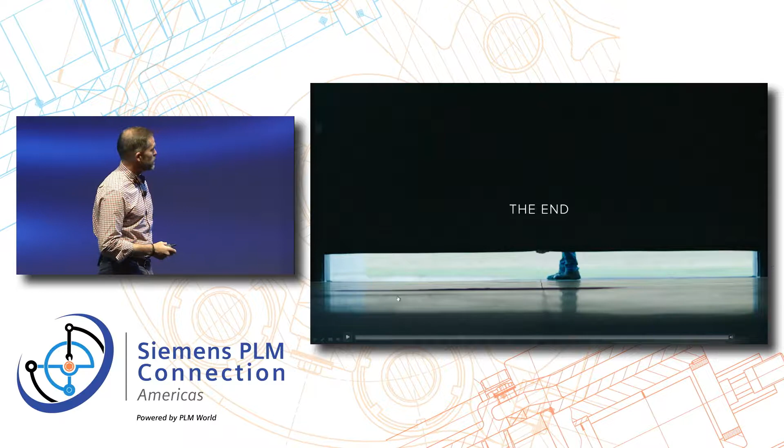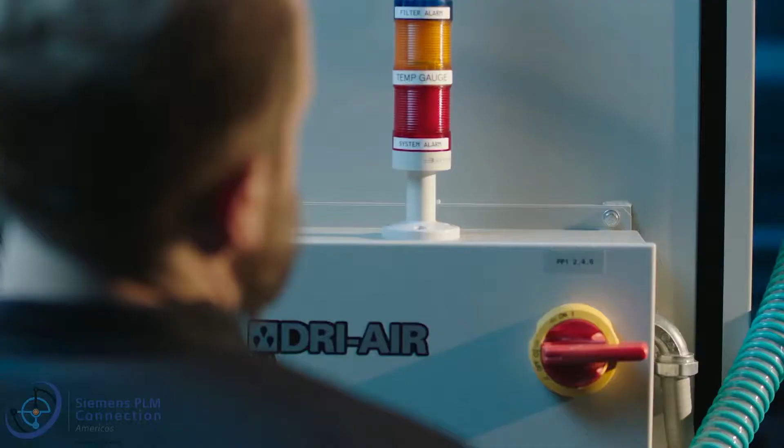This is the end. The end of the assembly line. The end of the showroom floor. The end of the smooth-talking salesman. The hard sell. The soft sell. The oversized inflatable gorillas and overinflated inventory that absolutely must go. This is the end of the junkyard full of old cars leaching chemicals into the ground.

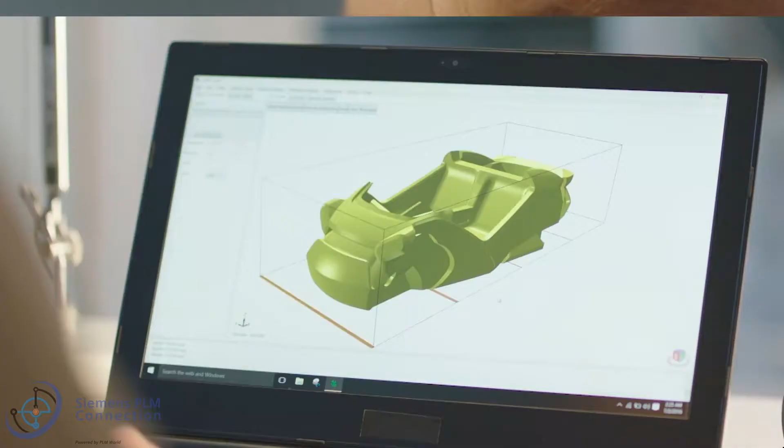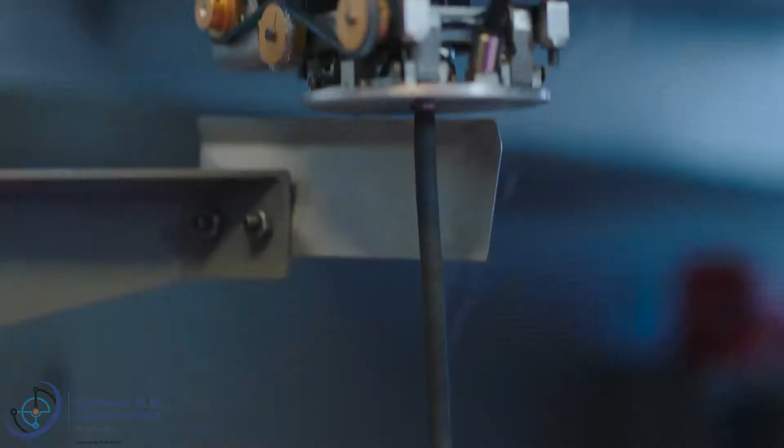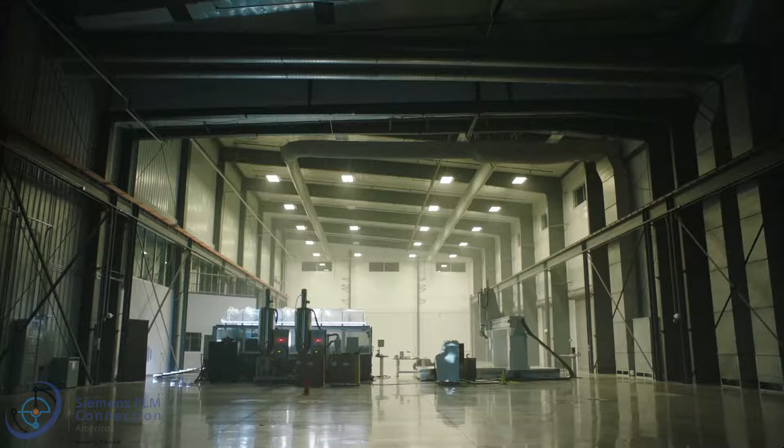Born from the concept of cradle-to-cradle manufacturing, printed in front of you to be the exact car you want. Melted, deconstructed, and rebuilt to be the next car you need. This is where vehicle manufacturing as we know it comes to an end, and where vehicle manufacturing as it should be begins.

Starting at the end gives you a really good idea of what it was like to come along this journey. In 2004 and 2005, I was a Marine patrolling the lower 250 miles of Iraq. During that deployment, two of my friends were killed - one in a Humvee in a frontal ambush, and the other in a CH-46 helicopter that was shot down, flipped over, and he drowned in it.

During that deployment, I was really thinking hard about whether I was going to share the same fate, or whether I was going to come home and do the next thing in my life. I was reading a book at the time written by a brilliant guy named Amory Lovins, who talked about using epoxy composites to make lightweight sheet material.

That was known as FiberForge at the time. The business doesn't exist in the same form now, but it was inspiring for me to think about building things in a different way. I knew that if my friends had had different equipment in Iraq, we would have had a different outcome for their lives, certainly. That inspired me to start this business.

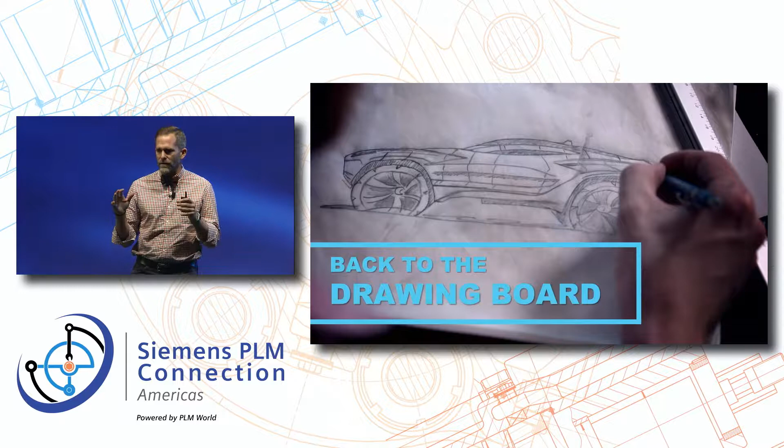But I started by going back to the drawing board. Many of the fundamentals of manufacturing, starting with that video at the end, were things I was just imagining at the time. I wanted to make products, make big products, make vehicles digitally so we could accept new technology into them. At the time, I was thinking about things like armor and drivetrain and Blue Force trackers and other things like that.

The point being is that it was so difficult to stamp steel and make tooling that it was hard to imagine how you could reduce the cost and time to develop a vehicle in order to onboard that new technology.

So we went back to the drawing board, and I was sitting there with a piece of paper in my Quonset hut south of Baghdad, thinking about how I was going to build this business. It started with these two elements.

The first one, at the end, the microfactory, I imagined as something like carving a clay model, not by hand, but doing it by a CNC device. I had used plasma cutters before. Water jets weren't around for me to use, but I was imagining something that could move fast and work on a structural material.

That was the concept of putting it together in a microfactory where you could have one machine that worked on digital instructions, or you could have 20, and it didn't cost you any more if you wanted to add them — just the CapEx of doing it, but there wasn't any economy of scale you would get.

Then on the other side came about a year later. As I really began to dig in and write the business plan, I thought, what if I am right? What if we could discover a digital microfactory that really could work from concept to production very quickly? I wasn't sure where all the ideas would come from.

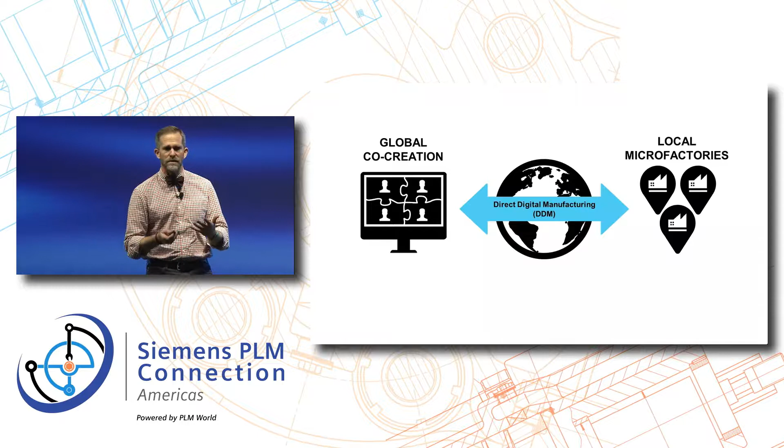By ideas, what I mean is not just the designs, but where would the technologies come from that would be the new pieces of armor or pieces of gear that you would hang on. One of my advisors said, you know, you should start a global community. I met this t-shirt company that was asking their customers what kind of t-shirt did they want to buy.

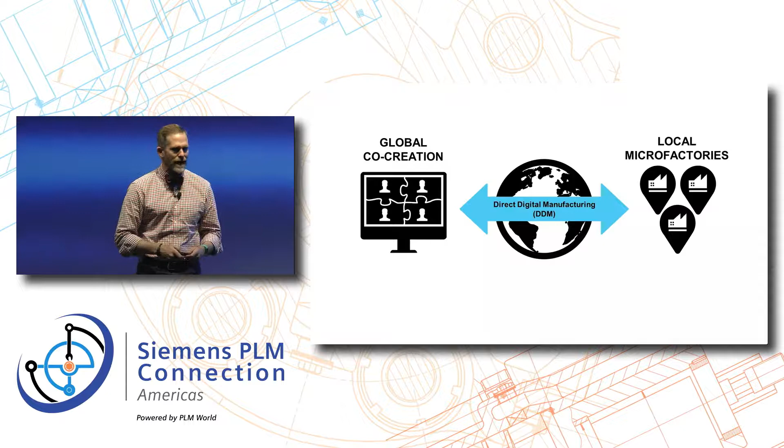And we did. So today, LM Industries is made up of two parts: Launchforth on the left and Local Motors on the right. Launchforth designs it with our community. Local Motors makes it and takes it to market. I want to talk about what that process means.

When Launchforth goes to market with our customers, when they talk about designing something, they're employing the principle of co-creation. Really what it is, it's a collaborative engagement between a global community of people that we steward, that we've built over the last 12 years, and with experts that we recruit actively to bring knowledge to the process of co-creation, and our own team that's going to end up being responsible for prototyping and micromanufacturing these pieces of gear.

That's what co-creation is. Microfactories are a little bit different. They're expeditionary boxes that are driven by digital, all the way through. We think of DDM as something that's in our soul — direct digital manufacturing. A lot of people like to throw the word prototype at us, and it's something we try to kick off or shrug off our back as much as possible.

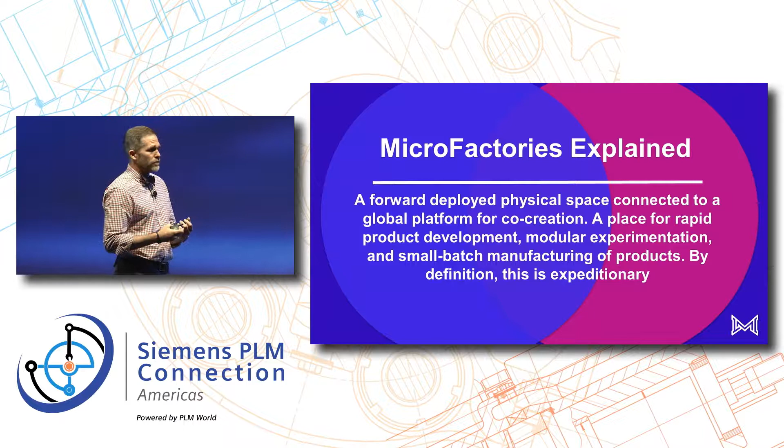Direct digital manufacturing for us is the promise of what a microfactory can offer. It's something that can take from the co-creative design and make it real in a unit of 1, a unit of 100, or a unit of 2,500.

So here's where we are today. Our community, after 12 years of incredibly hard and fun work, is over 180,000 people worldwide now. That means we can run challenges for things we've never even dreamed of at the beginning of the year, or the beginning of the month, that we were going to work on.

We've run over 100 of those challenges, and we have so many designs that are getting refined — it's the tools, and the reason why I'm here talking to you today, that make this possible. In the last year, we've distributed, thanks to Siemens, 2,800 licenses of Solid Edge alone. So for a starter project, for a mainstream engineering product for those community members, there is clear uptake for these experts to get better at what they're doing in a digital world.

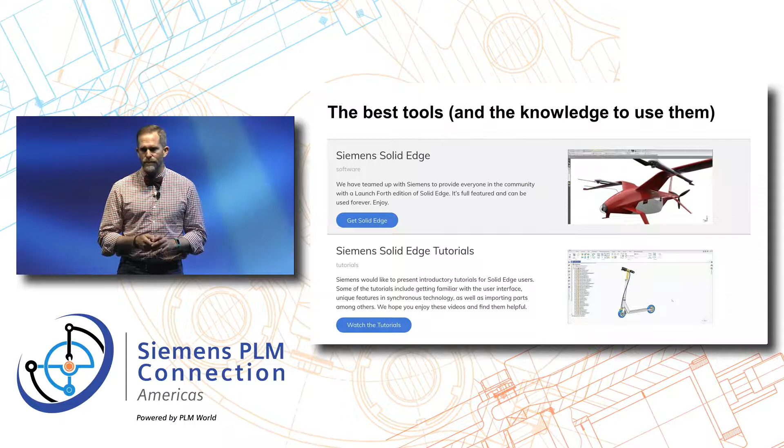It's important for them to have great tutorials, and it's important for them to have peers in the community that they can look up to. So the other piece of the community that I now rely on, that we rely on in our business, but wasn't intuitive when I was first writing the business plan, is a growing labs network.

So you could have ideas from your community, and you can have microfactories that put them out, but the technology that flows into those products is often the seed of what we make. When you think about autonomy today, it's full of many different types of technologies: sensor technology, CPUs, VCUs, ECUs, GPUs, TensorFlow chips, wire harnesses, all those kinds of things. And every single vendor has an idea of what they could do that's new.

Usually they're pretty scared to share it with the OEM that's currently buying their bulk product, because they know the time to get it into market is longer than what they'd like in order to get a real test bed with customers. So we've promised our labs network, which is growing, that we can get their newest technology into vehicles in a cycle where they can get feedback and decide whether they want to put more money into it or not. We think of the whole process as going from ideation to product.

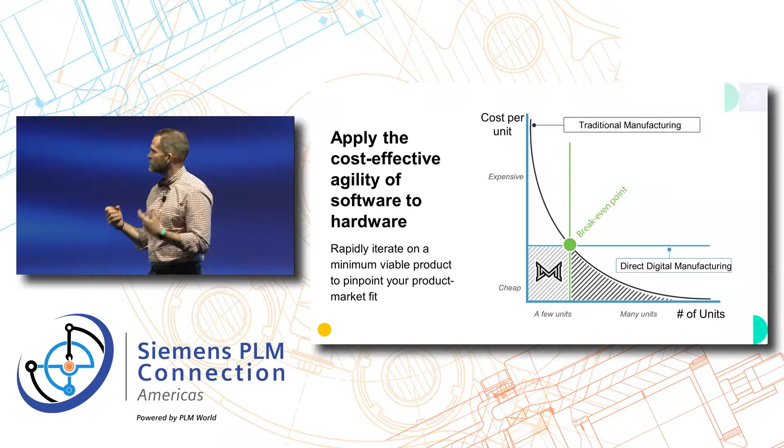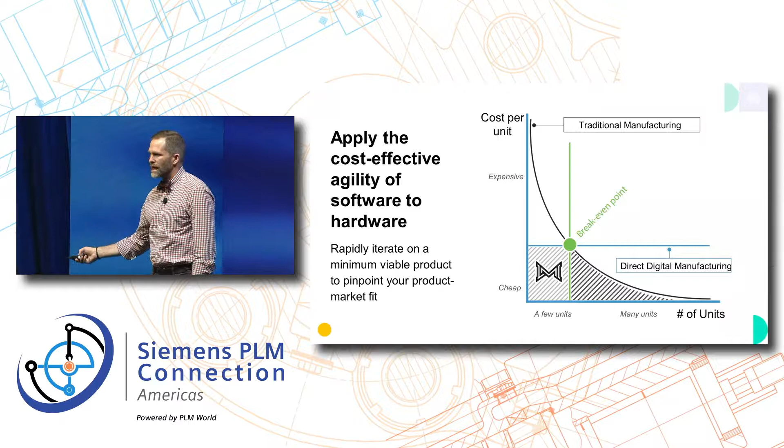There's a simple graph we've been able to draw, and versions of this have been out for a long time, and now we feel it every time we work from Launchforth all the way through to Local Motors. The traditional cost curve goes from really expensive development cost, amortized over very few units, then slopes down to many units, and the development cost is amortized. When you employ direct digital manufacturing, you're basically taking this black curve and flattening it to the blue line, which means you can become competitive making fewer units at a lower cost. That's the microeconomic analysis, and I promise it's the last chart I'll put up like that.

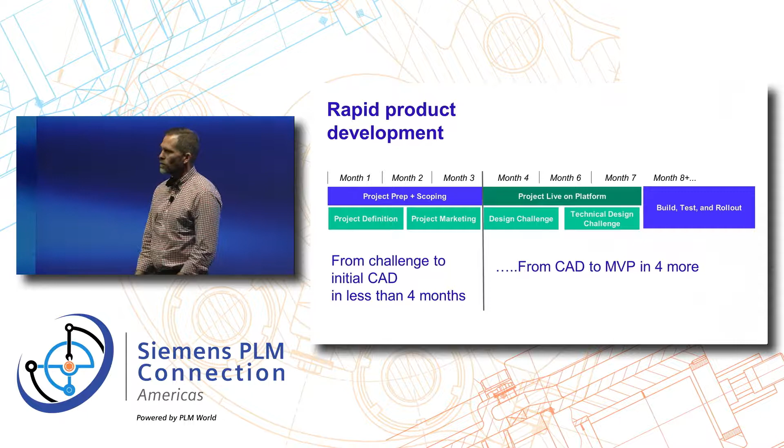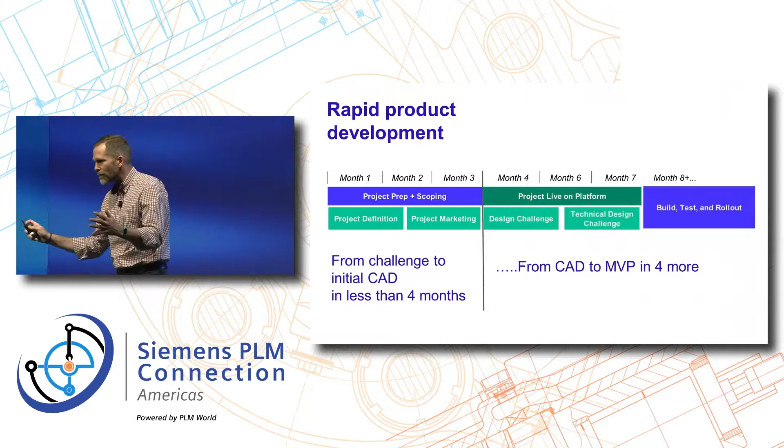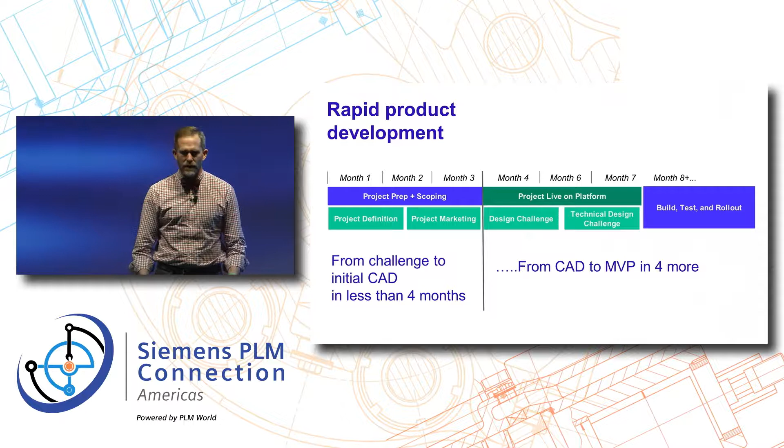What it really means to us is that from challenge to initial CAD, we've proven we can bring our community to that cycle in less than 4 months. Then we throw it across the line and go from CAD to MVP in another 4 months. So in 8 months, we're taking something that never existed except in the specifications of a challenge and putting it into a prototype that will go through direct digital manufacturing into a product. That's what we promise when we go after a challenge for our community.

So, some origins to our success today. We started with the Rally Fighter. The Guinness Book of World Records calls it the world's first crowdsourced or crowd-derived vehicle. This was a really exciting project because we had never dreamed how much the technology would come along in a microfactory. We finally accessed some basic technologies for mold building, panel making, tube cutting, and other things like that, and really pressured our CAD and CAM software as much as possible to get the Rally Fighter out. We made 100 units of it before we ceased production, but it was the promise of what was to come.

And then in 2014, we debuted the world's first 3D printed car. This was an awesome evolution because it was such a huge step forward for us to run a worldwide design challenge, source this guy, telling him basically what we thought the technology could do. We had never printed a car this big before, and the first vehicle that we printed, assembled, and drove away happened live for us and our community at the same time.

And so then we went on with Airbus to build the world's first crowdsourced drone. The winner here was Russian, not Italian, not Korean, like the former two winners. This drone really got us to where we are with Airbus today, thinking about how you can succeed, fail, and look at various modalities of flight controls, aerodynamic surfaces, serviceability, and other things, moving a community to participate with a large company like Airbus, which is good at aerostructures and certification, but not good at speed. It was a great partnership to show how we could work at mobility, but move things beyond the ground.

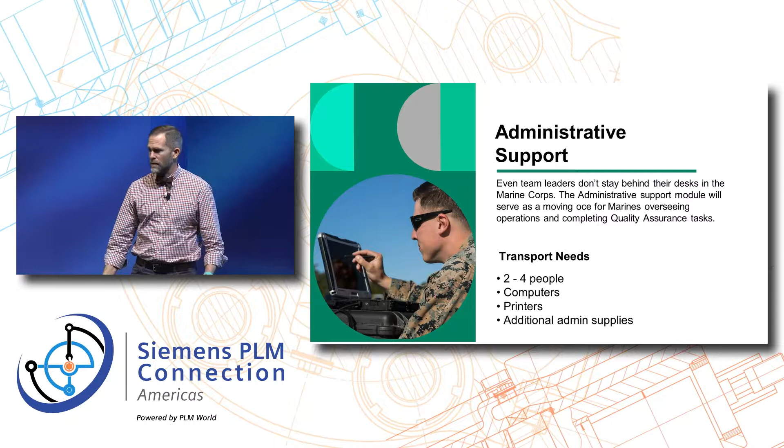You don't want to be leaving a whole half pallet of somewhat used ammunition without control on it for the enemy to pick it up. So what the Marine Corps is looking for in administrative support starts on base and it goes to the field.

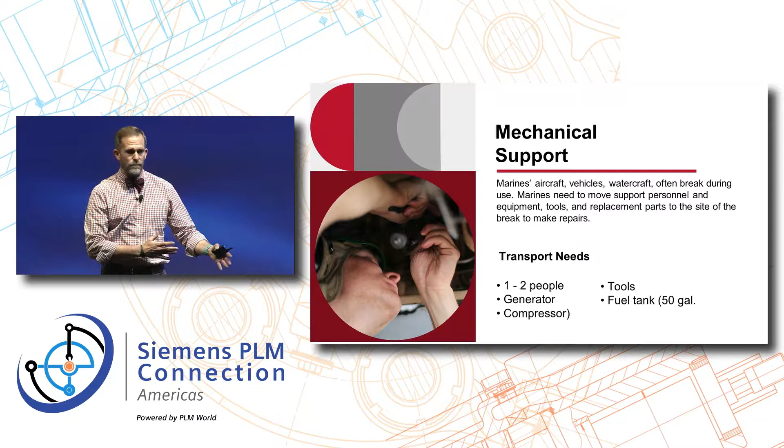And then beyond that, of course, mechanical support. You want to be able to fix the gear that's out in the field, and then as you get new gear that flows in, maybe it's a transnational partner or other things like that, you want to be able to upgrade the vehicle that you have that provides mechanical support.

And lastly, you have construction support. We build a lot of things. We build HESCO barriers, we build all kinds of guard posts, we build fighting positions, we build humanitarian assistance, log positions, other things like that. Forward arming and refueling points.

It's an intensive environment, and so having a vehicle that could do all 4 of these things is what the Marines tasked us to do.

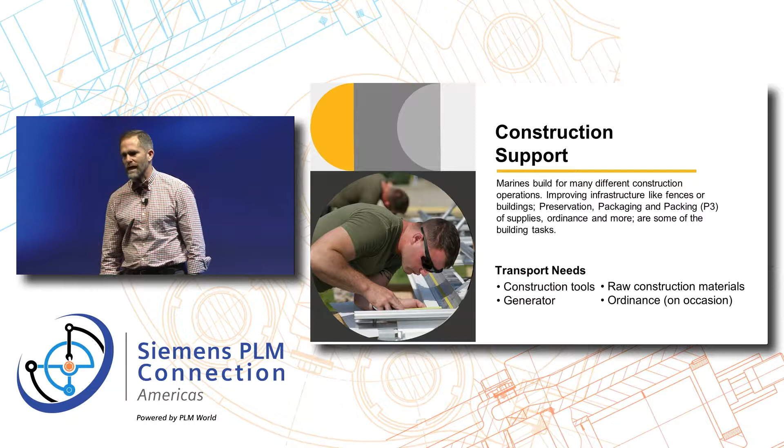And bottom line up front, here was the winner. Out of hundreds of entries that came in, this man designed a vehicle that the Marine Corps and a panel of judges chose for being the right direction for where we wanted to go on the digital thread.

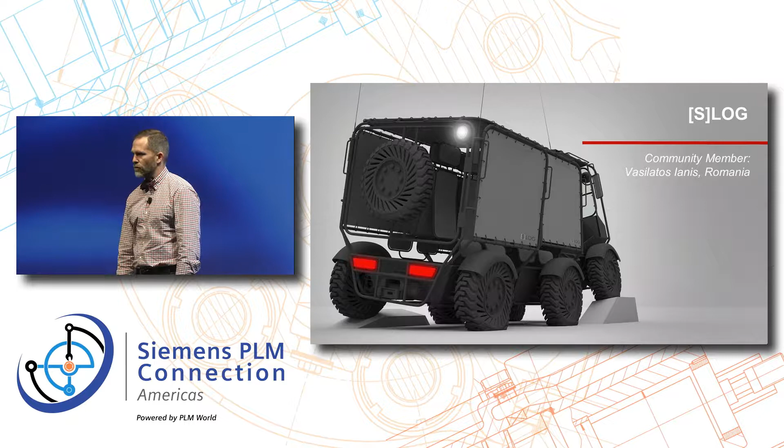And then we threw it back into the co-creative loop, and we took what he came up with and we did a refinement challenge. This refinement challenge came from a totally different community member half a world away that dug into the intensity of the modules that he wanted to carry around on base and built this vehicle called the HAT 2.

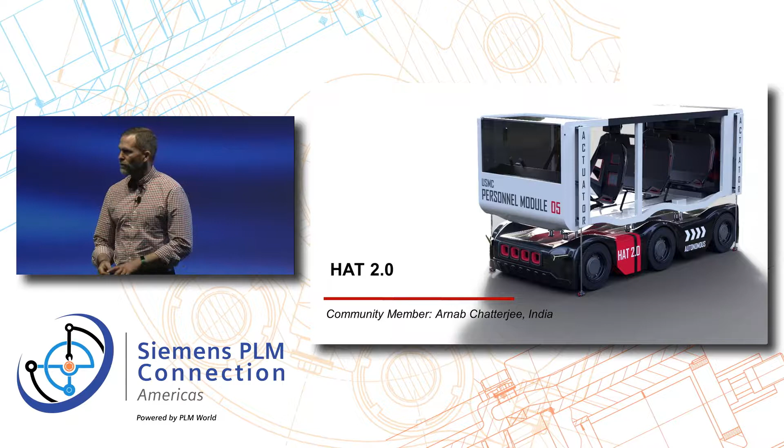So when you think about it, going from co-creation through prototype all the way to product in direct digital manufacturing, these are the elements that you find. You need to be able to develop the situation, and sometimes you're doing it from scratch, like the Marine Corps started with us, and sometimes you're doing it from something that was sort of good, but needed to work better. And so bringing that out and making it transparent is what we're looking for.

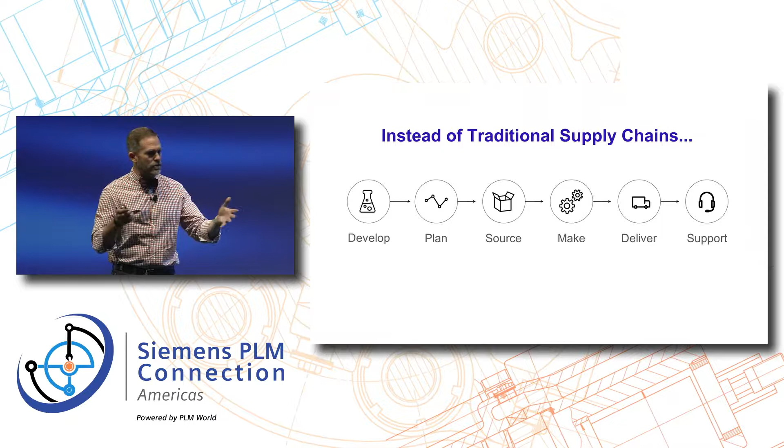You're getting validation for the decisions that you make. If your eyes are glassing over when you're thinking about subjective things that aren't driven by data, it's exactly that that can cause you to make good decisions before you take the technology and apply it to a solution.

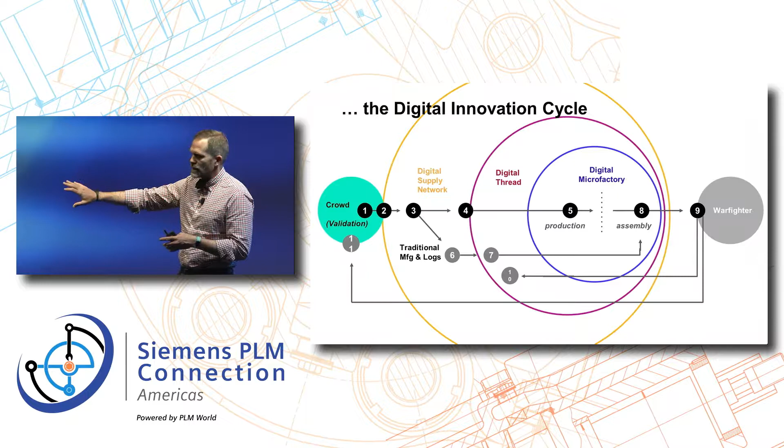And so when you think about that, then you're going through and you're saying, can I identify, as we move along this thread from 1 through 9, can you identify all of the pieces that are going to make this thing come together with as much simplicity so that we can hold it in a Marine's head and think about how it's going to meet all of the things that I need to do.

Cost, is it going to be serviceable? Is it going to get the mission accomplished? All of those kinds of things. And it's really difficult if they can't see the end up front like we started.

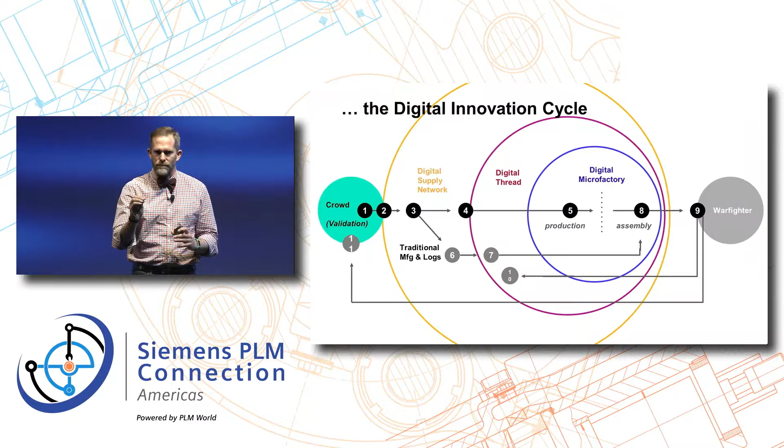So in the middle of it, the harder part, the blue circle, is the digital microfactory. And that was one of the things that I think we were able to show them and crystallize, is that it's not expensive to build a digital factory. What's expensive is to make products that don't keep the warfighter safe.

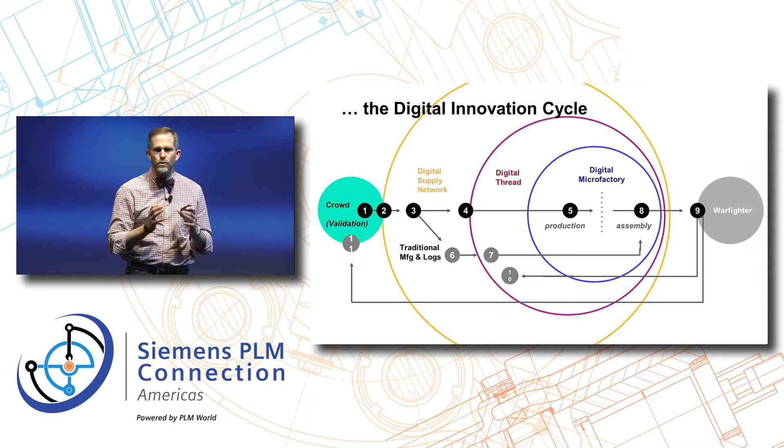That's where I started in 2004, but the tools weren't available then to be able to make this happen, and today they are. So when I think about a digital supply network being dynamic and self-optimizing, it's definitely true today in 2018, and I just came in from Germany 30 minutes before I got on stage here, and I was at an AI consortium with a great deal of folks that are working in our labs network.

And we're talking about the application right now of artificial intelligence to that labs network. Go all the way back to the beginning in 2005, where the idea was if you could build a digital factory, you would need many more ideas so that you could sift through them all.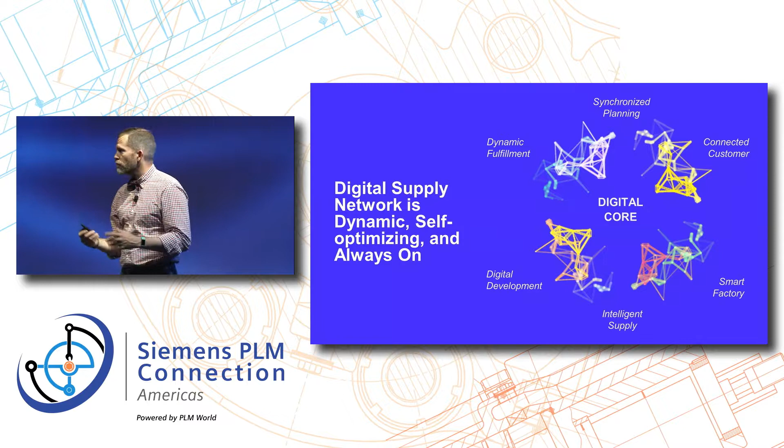We're now at that stage where the technologies and ideas are getting so voluminous that we need more intelligence to sift through them, so we can proffer the right ones to pursue and see whether it's worth spending the time with. That's the growth of where we are in the digital supply network, and all these things surround that as you go through it.

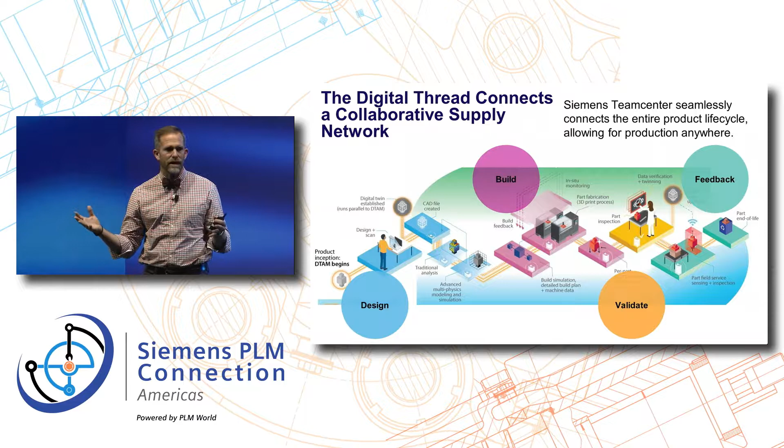It wasn't until four or five years into our business that I ever thought about nominal CAD, and then thinking about it as built, as printed, as then subtracted, then as assembled, and then as ruined by the customer. But those are all the states you need to plan for when looking at this digital thread. And the tools are just not that good. I'll use specific examples.

When we print a body, we simulate it. But most of our patent development and work at the company has been on making that digital manufacturing work the same way every time. We've known that if we don't know how it's going to work, how does somebody else know how it's going to work?

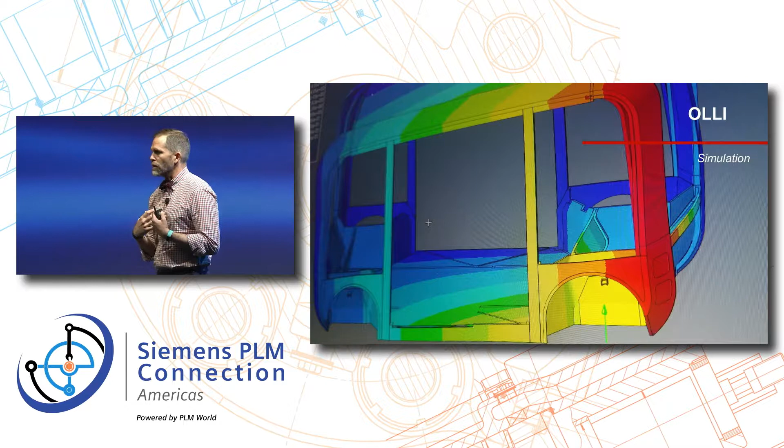So where we are today between design and build, thinking about as built, as cut, as assembled, and as ruined by the customer - this is what we want to know we've simulated, so that back at the CAD stage we have software that can tell us: don't make that wall there, don't put that soffit there, don't put that radius there. Those are the things we want the computer to tell us so we don't make those design mistakes, because our factory can build it very quickly.

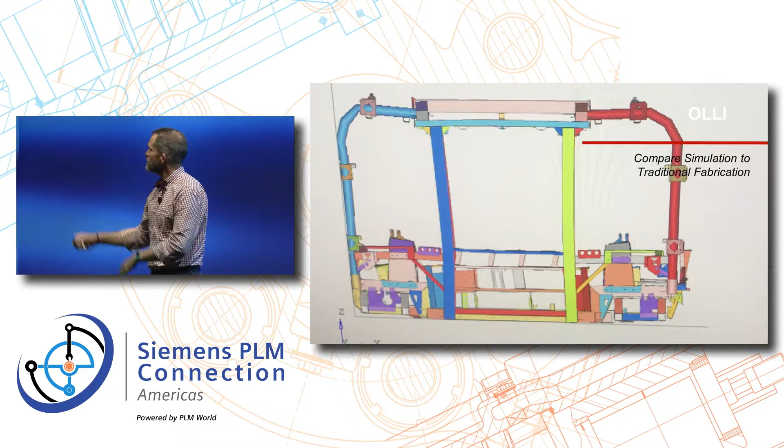So we're missing some pieces in between, but we're getting there. One thing you can see is this traditional body - we took the time to build one this way so we'd know the difference between printing it and making it out of a traditional frame or stamped body. We can see the difference in assembly time, failure rate, weight, and all the other parameters you need to solve for.

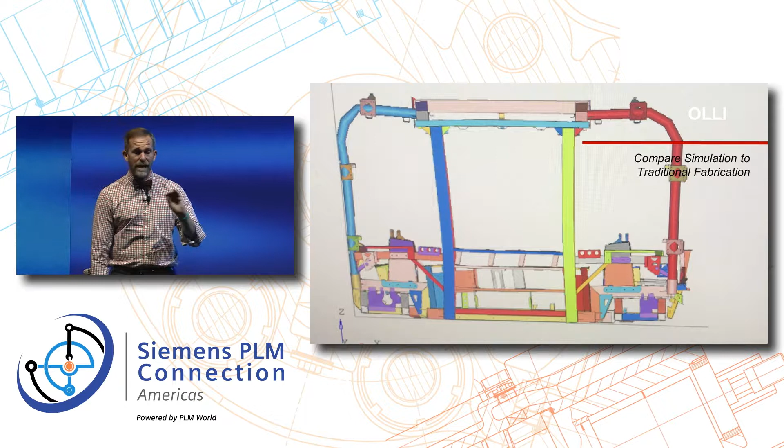If you went back to our first print in 2014, it took us 44 hours to print a vehicle that delaminated every third print. Today, we never delaminate when we print, because we understand the conditions, the chemistry, the setup, and the software needed to make all those things come together and work.

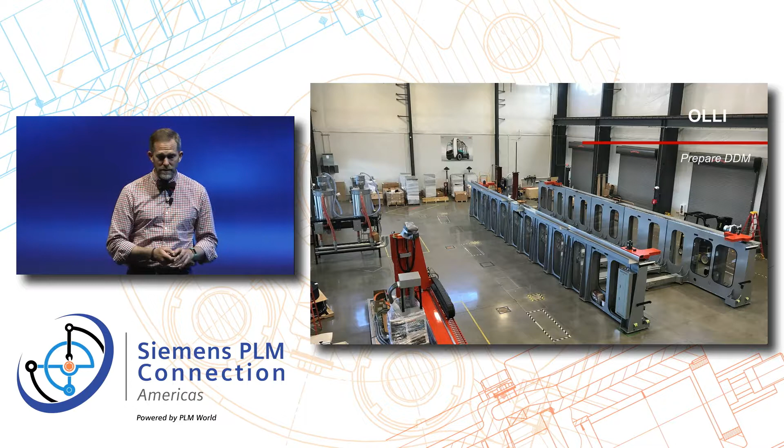So we felt we had the guts to build a machine like this that could do multiple bodies at the same time. This machine will go live in two weeks and will be in production for this type of vehicle. This body shows roughly two times the torsional rigidity of a traditional vehicle.

It has better crash properties, and it definitely holds way better equipment than the first vehicles we would have made. And every time we want to make a change, we simply change the CAD at the digital thread, and we go back, and we now know much more about it.

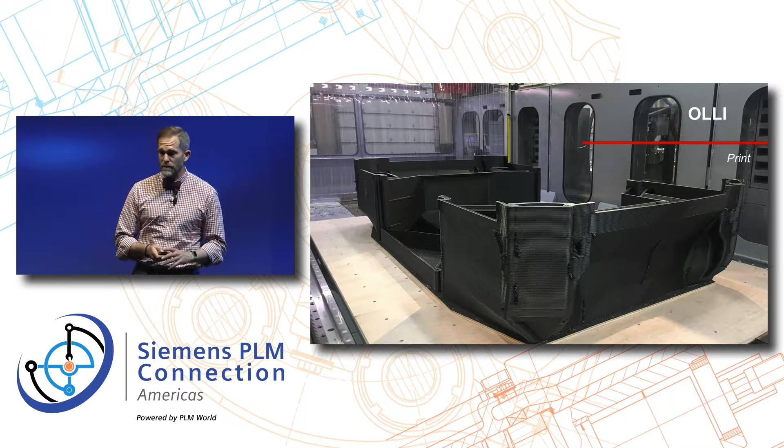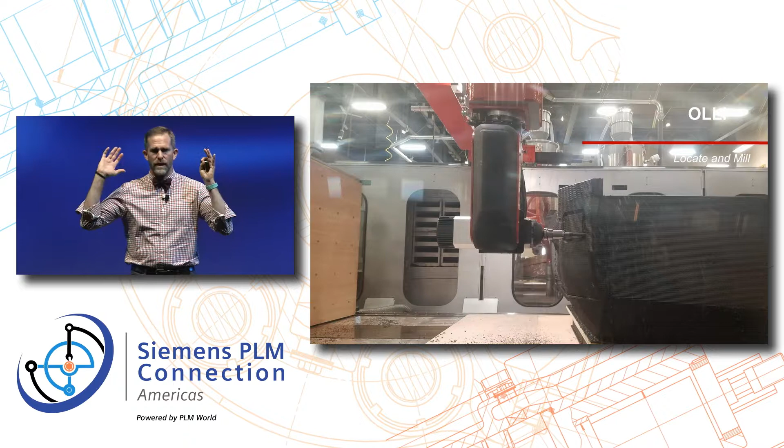So this is it being printed, and then this is it being milled, pictures that you know about. But when we used to throw beads and not understand what would happen, just to give you a sense, we used to spend 44 hours printing a vehicle and about as much time subtracting it. Today we print an Olli in 9 hours, and we spend 10% of that time doing subtractive work because of the way things have moved along.

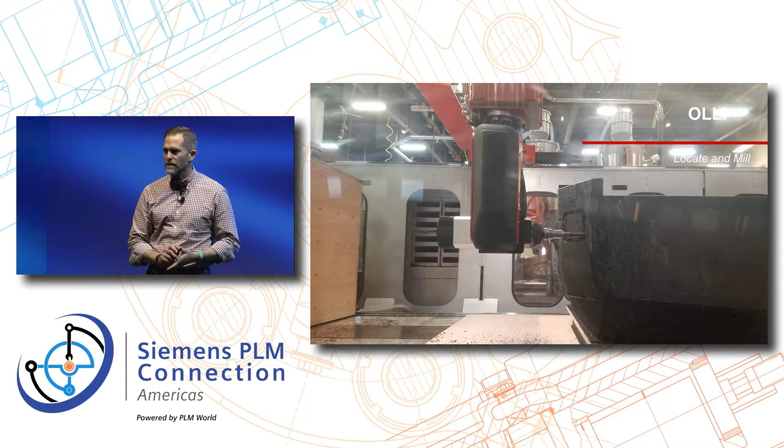But the design rules are still too analog. And so my call to industry is to try to get that moved along faster, so that we can get that predictive analysis up front for the CAD you design, for all of the things that are going to come downstream, not just in additive and subtractive, but also when you assemble and validate.

So this is an example of assembly from a torsion testing model where we're carefully controlling for all of the items going on in the vehicle, so we can validate our model and understand. It's not actually a suspension setup right there, but it's controlled for 6 degrees of freedom around the vehicle, so that we can actually torse the vehicle and understand whether the model is correct.

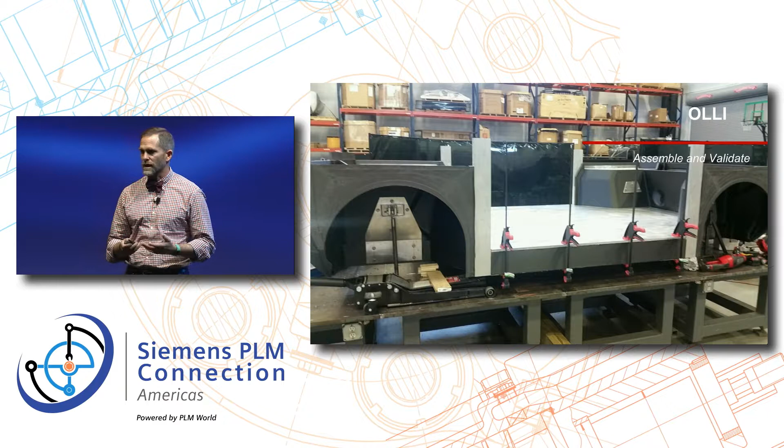And then lastly, of course, for us today is deploy and learn. So we've delivered vehicles now all over the world, literally. They're going to Australia, they're going to Korea, they're going to Copenhagen, they're going to several places in the United States, and it is happening right now.

And it's super exciting to think about the fact that the microfactory soon will be able to follow the vehicles. So they can go to Copenhagen, and they can go to Australia, and they can go to Korea, and if we don't like the way the vehicle's working, we can send new instructions, we can take back in the vehicles, we can use those components that are still able to be used, like a new battery, new headlights, other things like that, and yet we can take back in the material, recycle it, and get a new design out that behaves better for what we're doing.

So, my final comments here are that a mobility revolution is happening. It's all around us. It started for me in 2005 in Iraq, but basically the people, the places, and the paradigms we think about it are evolving and revolving today in a way they haven't in 120 years. It's all around us, and it's not just Uber, and it's not just scooters, and it's not just bike sharing, it's everything. It's drones, it's all of those things.

So we have an obligation to be great. Specifically, scientists, engineers, product designers, we have an obligation to dig in and be great. And we need to think about what happens when you poke the biggest system of them all, because mobility is definitely the biggest system of them all.

In the US alone last year, we drove 3 trillion vehicle miles. That's not people miles, that's vehicle miles. And in the world, we drove 10 trillion miles. If you cost that at $1 a mile, which is roughly what it costs to sustain vehicle mobility, that's a $10 trillion cost industry. How much will you pay for that industry? Depends on whether you're paying for it as a consumer or as the government.

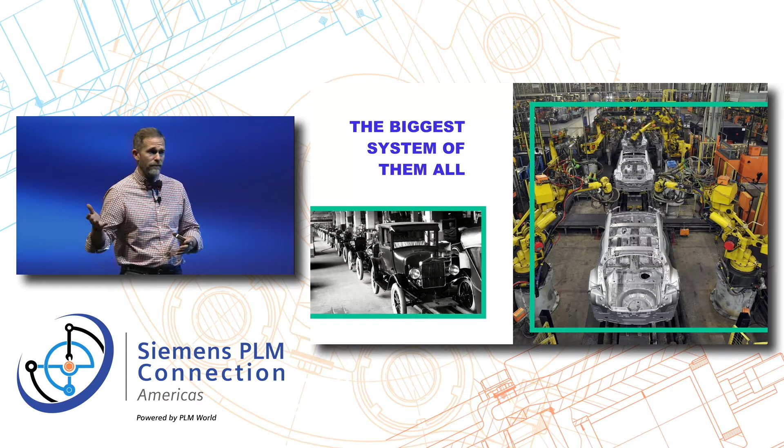So that's what we started with in 2004 and 2005. And thanks to our partners at Siemens and so many other partners, we're here today at the cusp of being able to solve so many issues in a digital revolution, in a mobility revolution that's powered by a digital manufacturing capability. And I am thrilled to think about what next year will look like as we pursue new opportunities in the air, on the ground, and in the sea from microfactories that we're distributing.

We have 3 microfactories now, and we're looking to put 5 more up in the next 3 years. And it's up to our community and this amazing group of technologists and supply chain partners to help us see the future sooner rather than later.